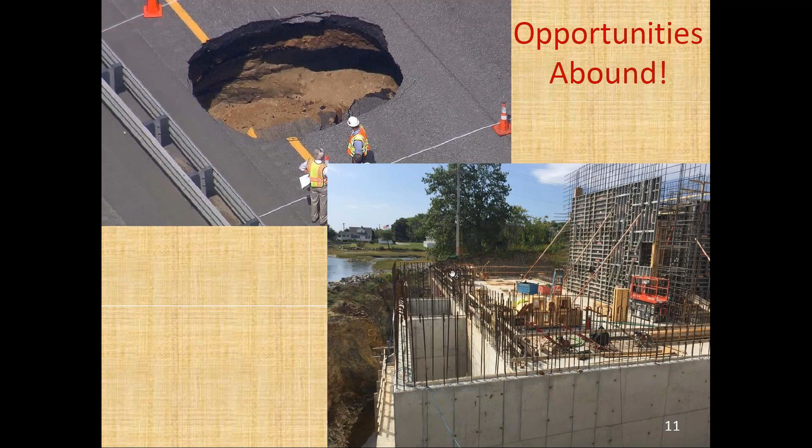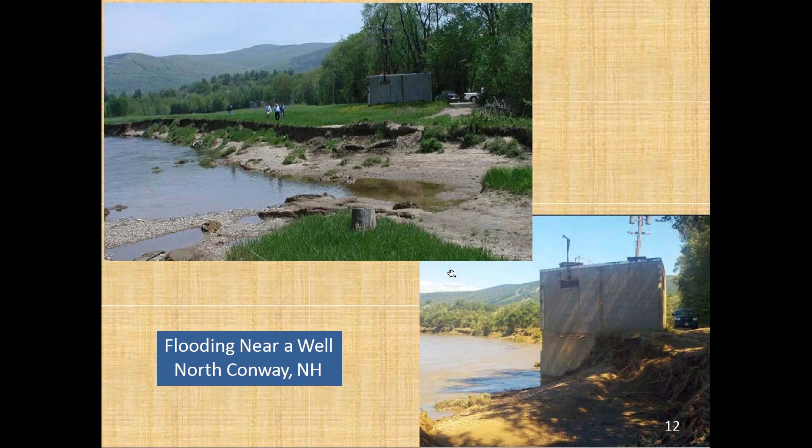Both drinking water and clean water SRF programs, we work together collaboratively to come up with the asset management umbrella of how we want to address climate change mitigation and climate change adaptation. Through this asset management umbrella, we're having communities inventory their assets, figure out their level of service, condition assessment, risk assessment. Communication is a key piece of all of this. Prioritization of their assets is important, as well as financial planning and life cycle cost analysis.

But to really address climate change, we're taking that asset management umbrella and adding more tools to it, and they all build to make it a more effective utility management system. We're supporting planning efforts, energy efficiency, flood resiliency, power resiliency, vulnerability assessments - those all go into figuring out where we need to focus efforts. Even a mindset shift, going from a mindset of waste or wastewater to resource recovery - those are all important pieces of this puzzle.

For the rest of today, I'm going to focus on just the energy efficiency tool, or the piece that adds to that asset management umbrella, and what we're doing with that through our Clean Water SRF program as well as Drinking Water SRF.

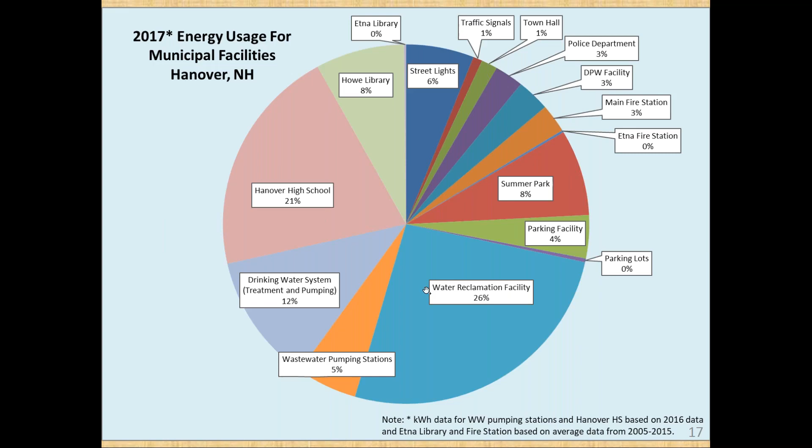So we looked at how they rank relative to other communities. Well, they're one of our most efficient activated sludge treatment plants. Just imagine what percentage that energy use would be for the municipality if this was a less efficient system.

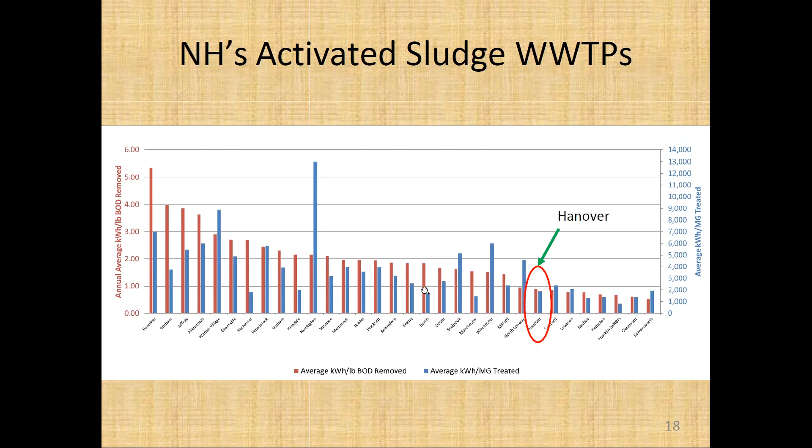As we were getting started in our energy efficiency program, one of the early things we did was update our design standards. We wanted to help these plants come online from upgrades and new facilities more efficient than they are now, because in the past everything was built for peak flows and peak demand 20 years in the future, which makes it difficult to operate, and certainly difficult to operate efficiently at day one.

So we really encouraged, instead of 2 really big blowers, putting in 3 to 5 smaller blowers, to have some flexibility in operation. You have to meet current peak demand and turn down requirements, which help you avoid over-aerating at the current daily minimum flows. We did the same thing for pump systems, giving them the option of putting in multiple smaller pumps, or at least leaving room so that as their flow and demands increase over time, they can add a blower or a pump if they need extra capacity.

So we had that in place, and then thanks to EPA giving us a heads up that the Department of Energy had a grant opportunity available, we jumped on board and applied, which, thanks to the partnership formed as part of this grant application with New Hampshire Saves, a consortium of the energy efficiency divisions for our 4 largest energy utilities, electric and natural gas, became our partners in this grant, providing the 20% match we needed. Through that grant, we were able to contract directly with our STAR auditor. This is a picture of him as a younger person.

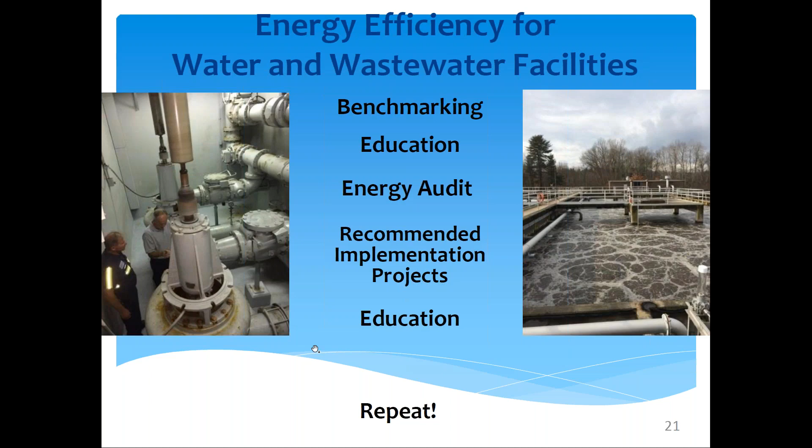We are continuing that cycle even though the grant is finished. We had really good feedback from municipalities and a lot of continued interest. So our Clean Water SRF fund said, well, we can provide low interest loans with principal forgiveness for these energy audits. We have some guidance documents, and as long as they meet that guidance, they can contract with the STAR auditor that specializes in drinking water and wastewater energy audits, and we'll forgive that loan when the project is finished.

But as you know, if you're working in the SRF program, the paperwork for small loans is no different than the paperwork for a large loan, both on the staff end as well as on the municipality end. So we had a few takers for this, but not as many as we would have liked.

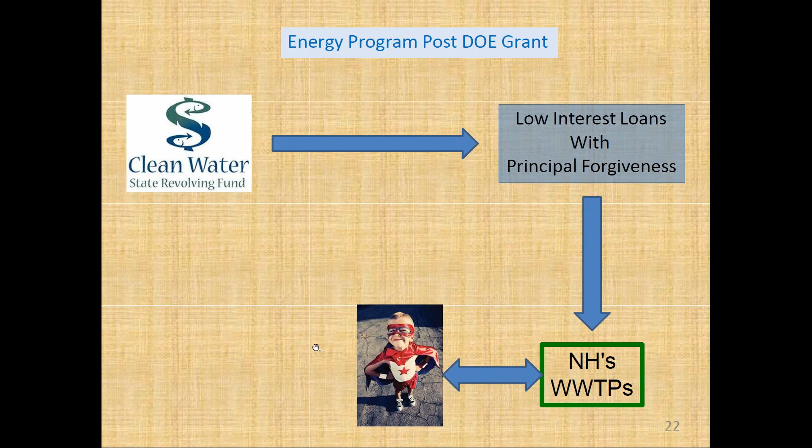So the next step was forget the loans. And this is the part that everyone loves, because there actually is a free lunch.

Through the creative thinking of our Clean Water SRF program and partnering with New Hampshire Saves again, as well as with Drinking Water SRF, we were able to use administrative funds and set aside funds to contract directly with the auditor, with oversight from DES Drinking Water and Wastewater staff, for the selection of which facilities we wanted to audit. We put a high level of interest on the scale, as well as embracing asset management. Those are things that help them score to receive an energy audit.

So when I get to call and tell a facility that they can have an audit, and all they need to do is just email me and say they want it, they absolutely love that.

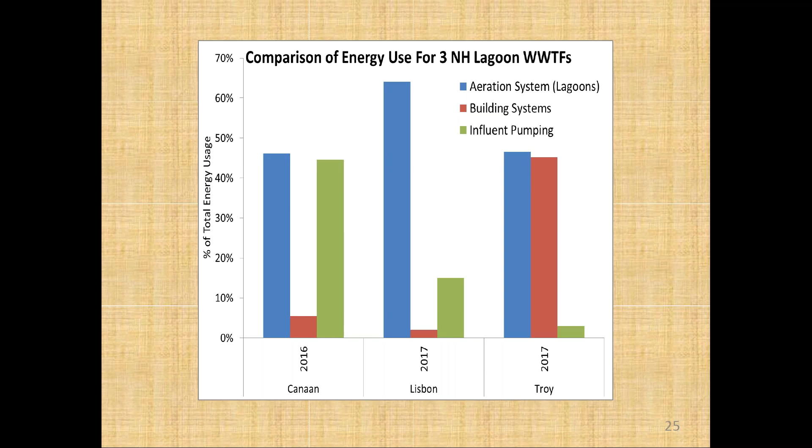This is Canaan, Lisbon, and Troy. They are three very similar, very small, very simple lagoon systems. Had they not each had their own audit, we would have said, well, you probably need to optimize your aeration system, and we'd be done with it. However, because of the audit, we found that Canaan had an influent pumping issue, Lisbon had an aeration issue, and Troy had an electric heat issue. So three simple plants, three totally different energy efficiency solutions. It really drives home why everyone needs an audit.

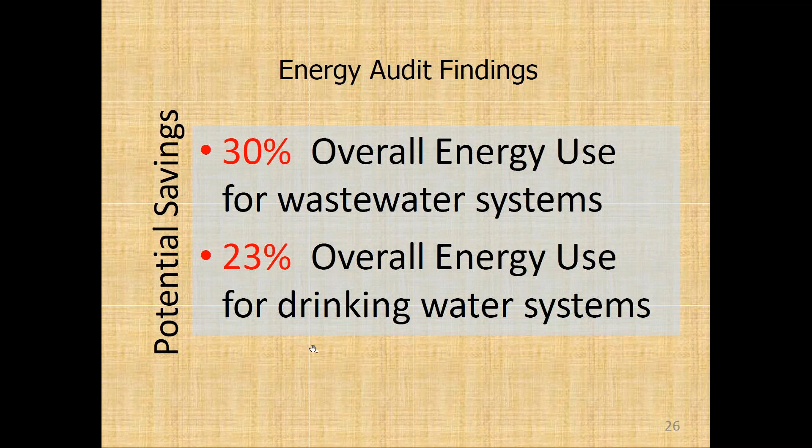Now, so far, our audit program has shown a potential savings of 30% for wastewater systems on average, ranging from 11 to 58% potential savings. Drinking water has shown 23% average savings. But with audits, it's a report—there's no savings unless the findings are implemented. So looking at implementation, those audit reports out of 41 audits completed so far, it's over $6.5 million in implementation costs. However, the projected annual avoided cost, or the savings, is almost $1.8 million, giving an estimated payback of just 3.6 years before incentives. So that's a lot of interest.

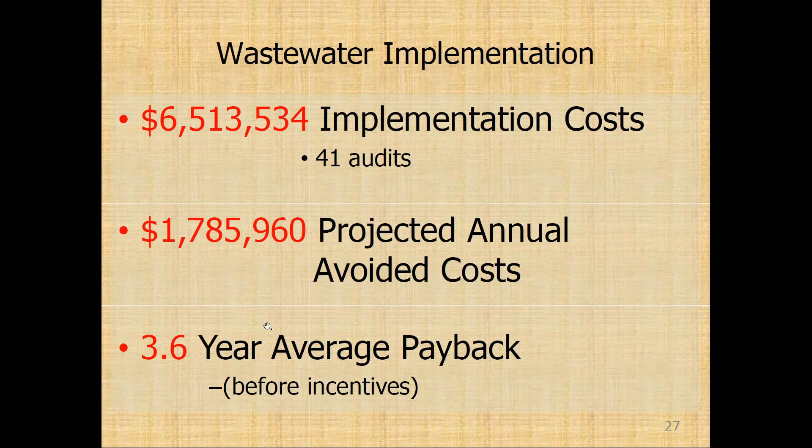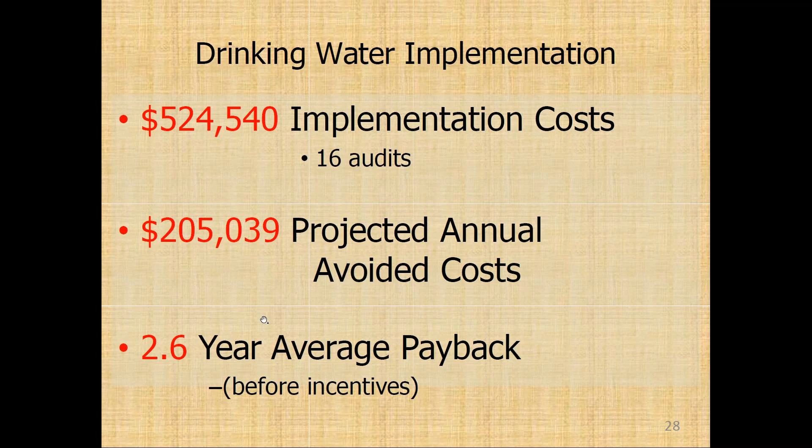Drinking water implementation: we've completed 16 audits so far, with $524,000 of implementation costs and over $200,000 in savings, for just a 2.6-year payback before incentives.

So getting into the incentives, I'm going to show a case study of how these additive incentives work. New Hampshire Saves, Eversource, in the case study I'm going to give—that's our largest utility—they have access to core electric funds, which everyone in the state pays into when they pay their electric bill, as well as Regional Greenhouse Gas Initiative municipal funding, or RGGI funds. Those we're allowing to be combined with the Clean Water SRF loan forgiveness that we have for wastewater projects, where we've instituted 50% forgiveness, up to $200,000 of the principal can be forgiven.

So that case study: this is the Winnipesaukee River Basin Program for Franklin, located in Franklin, New Hampshire. This facility is actually owned by the state of New Hampshire, Department of Environmental Services, and it's a regional system that serves 10 communities in the Lakes region in central New Hampshire. It's a prime tourist area, so it's a really important facility.

Last year, we selected this facility as the most efficient treatment plant in New Hampshire based on a kilowatt-hour per million gallons treated metric. We also have another facility in the state that we selected based on a kilowatt-hour per pound of BOD treated or removed.

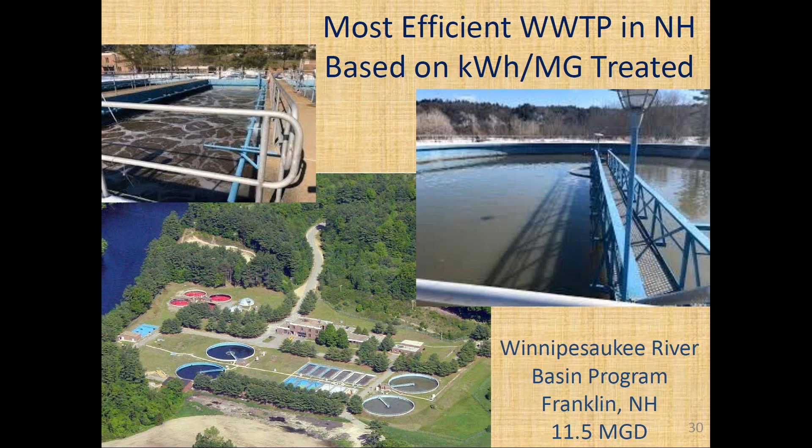To give you an idea of where they were, the Winnipesaukee River Basin is a really good example of EPA's Plan, Do, Check, Act cycle. They've just completed their third energy audit, and they complete an audit, then implement projects, complete another audit, then implement projects. So now we're on the third round of that.

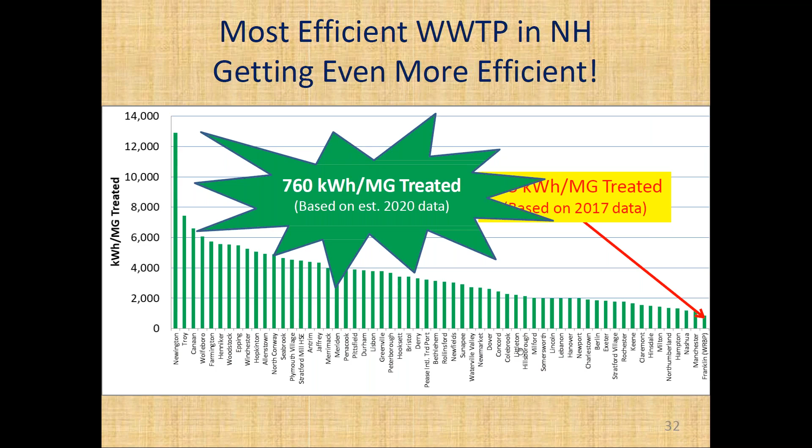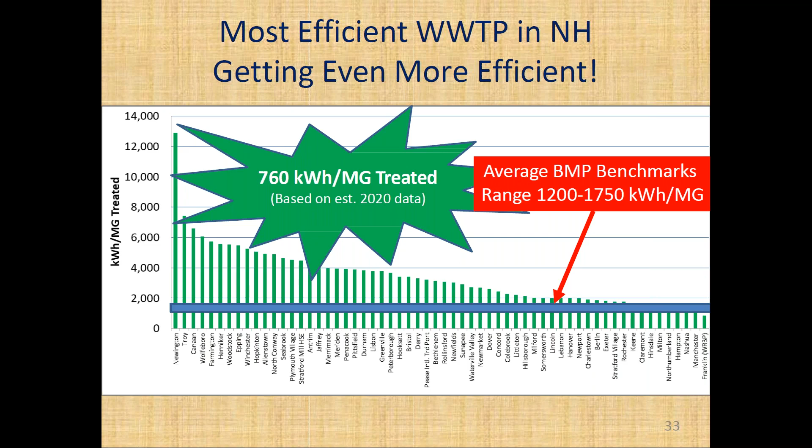Right now, they're using 853 kilowatt-hours per million gallons treated, which is pretty amazingly efficient compared to a nationwide basis—I'll get to that in a minute. After they implement the projects identified in their third audit, that will drop down to about 760 kilowatt-hours per million gallons treated. Compared to benchmarks I could find from other states for similar size and type of facility, that benchmark typically ranges 1,200 to 1,750 kilowatt-hours per million gallons. So after this next upgrade, it'll be about half of that, which is pretty impressive.

So the project includes addition of a right-size blower and controls. They're going to improve their process by not over-aerating any longer. They're replacing 2 return activated sludge pumps, and they're doing a lighting upgrade.

The estimated project cost is $400,000. New Hampshire Saves, Eversource, has committed $100,000 to this project. The Clean Water SRF has committed $200,000 in loan forgiveness. So the final cost to the loan recipient is just $100,000 for this work.

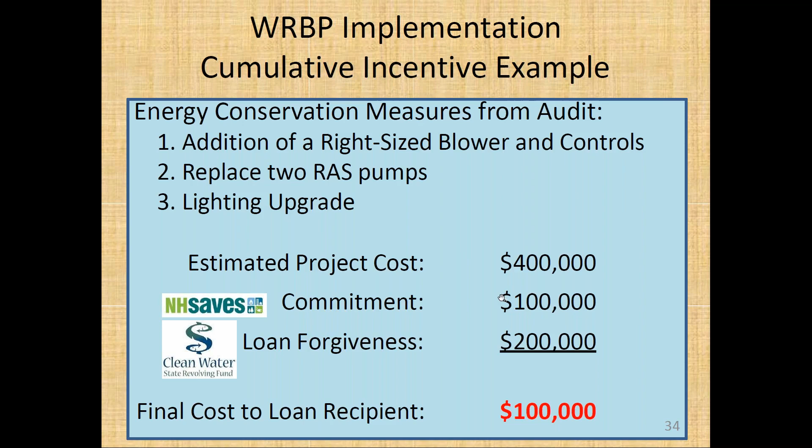The impact on the incentives of the simple payback: prior to incentives, payback was 11.2 years. It's a little on the long side, considering the equipment will probably last - it's got a 20-year life expectancy at least, and operators tend to keep things running longer than that. So it would still be cost effective. But after the incentives from New Hampshire Saves and SRF, the simple payback is just 2.8 years. So now it's certainly a doable project.

Then you look at the non-economic benefits that really add to that cost effectiveness. As I mentioned, improved process control - they're going to be able to no longer over-aerate. They will be able to monitor and control their dissolved oxygen with the control system that's being put in. So they're really optimizing how much air they're putting in the system.

How much energy they're using - they're lowering their equipment repair costs. They've got new equipment, so now they can focus on where that repair budget needs to go. They're also improving their reliability, both through redundancy - they're adding a blower.

They're lowering their energy use, so now if they're without power for an extended period due to a storm, they have more equipment that they can run on their generator. So all of that plus new equipment typically is more reliable.

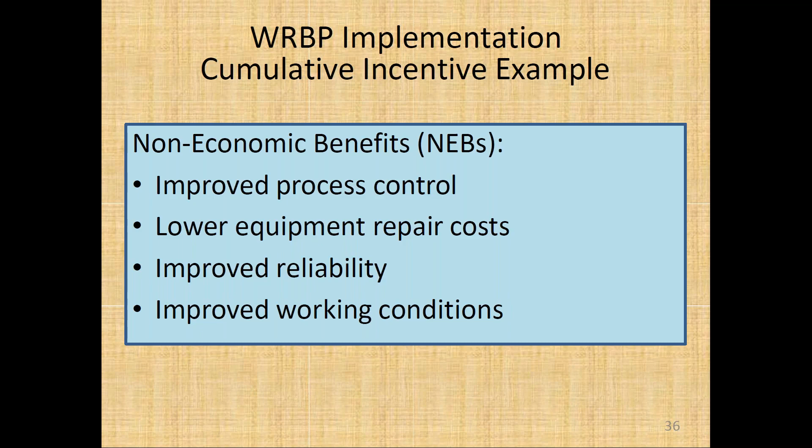They're also improving their working conditions. I don't know how many of you have been into a dark, dingy pump room that no one really wants to be in because they can't really see, the lighting's not very good. But when you upgrade the lighting, you can now see what you're doing to work. You can also see that it's a mess, clean it up, and now it's not a bad workplace. So everyone benefits on that.

To tie it back into climate change mitigation, the impact on the greenhouse gas emissions from reducing power energy usage down over 307,000 kilowatt hours a year will result in power plant emission reductions of over 400,000 pounds of CO2, over 1,000 pounds of sulfur oxides, and over 300 pounds of nitrogen oxides. So that has a long-lasting effect.

Winnipesaukee River Basin is a really good example of how to implement this type of process where they've figured out their energy costs. They hired their star energy auditor. They implemented energy upgrades, energy efficiency upgrades, and they saw savings.

And then they took some of those savings and they've gone through that process 3 times now. So now they're really looking at what can we do for renewable energy - that's probably the next phase for them. And if they can implement renewable energy, whether it's solar or an upgraded anaerobic digester system, something that's cost effective, then they can make those savings permanent and make the greenhouse gas emission reductions permanent.

So kind of tying this all back into the asset management umbrella and the climate change piece - our operators, drinking water and wastewater, they are amazing MacGyvers, we like to call them. They can keep some equipment running way past its expected life. But really, is that really the best answer for user rates, for energy efficiency, for climate change, for resilience? Those are the questions that need to be answered, and the data from energy efficiency and from asset management can help answer those questions. With that, do you have any questions?

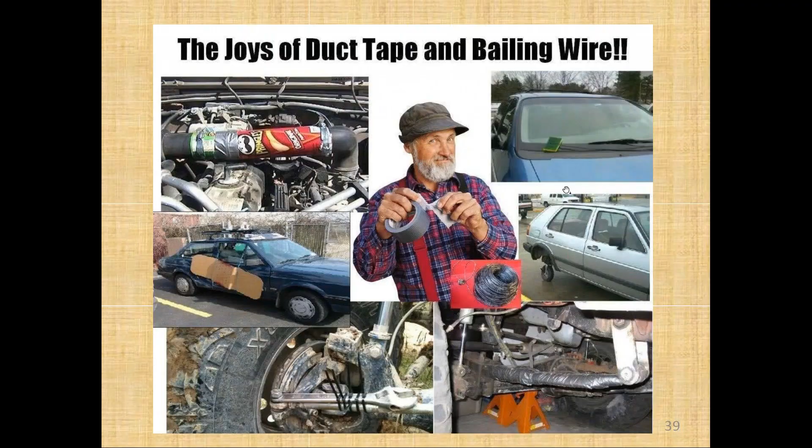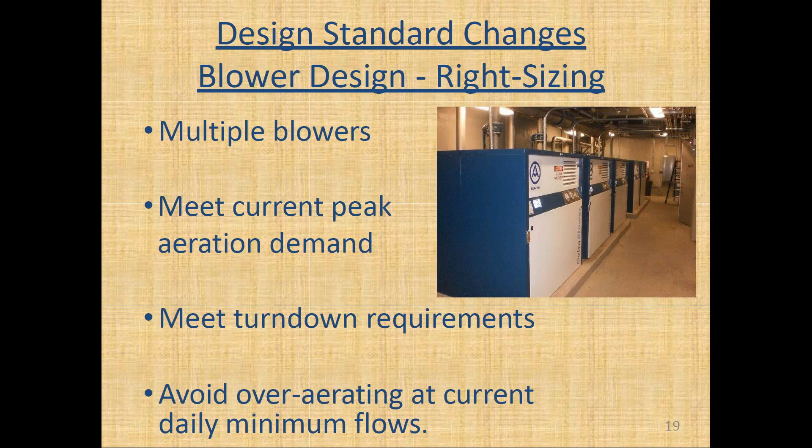All right, now, my name is Brandy Piers, like we had talked about before, and today I am here to talk to you about the State of Maine's Clean Water SRF and Climate Adaptation Plan.

So what is Maine doing? We're looking at knowing your risk, climate adaptation planning, and Maine's current status.

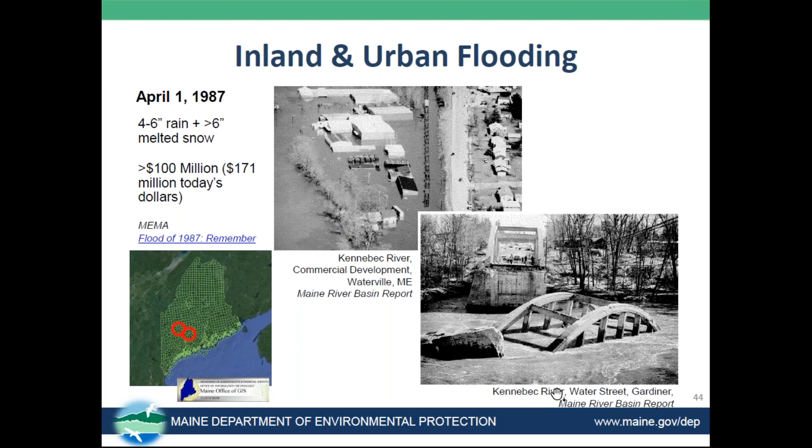So next I wanted to talk to you about a survey we sent out. We sent this survey out to some of our wastewater communities, and the state of Maine has a little over 200 publicly owned wastewater treatment facilities. This survey sample was 52 wastewater utilities were sent this survey, and we had 29 responses, meaning a 56% response rate.

Some of the questions that we asked were, has your facility operation ever been impacted by extreme weather events? Well, as you can imagine, 91% said they've seen extreme weather events affect their community. Only 3 communities responded no.

So what does that mean to us as a regulator? We have to look at this. It means we need to stop and assess our wastewater treatment plant. And what can we do to help?

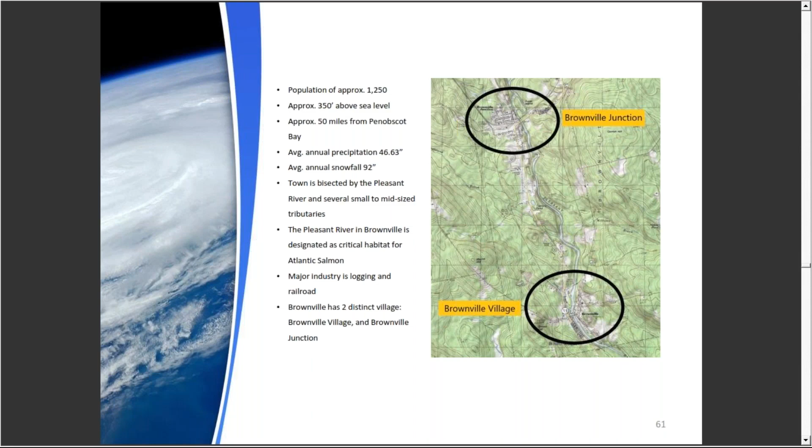So let's talk about the wastewater system in each of these villages. Brownville Junction has a conventional gravity collection system, mostly PVC piping with precast manholes, built primarily in the late 80s. They have 1 main pump station, which is a dry pit non-clog style pump station, which collects all wastewater and pumps it to the treatment plant.

They have 4 smaller submersible stations, all grinder stations, duplex stations, with a centralized wastewater treatment facility. That treatment facility is a large engineered subsurface septic system. The one main pump station does have a dedicated generator on site. The 4 smaller stations do not, but they have receptacles for a mobile generator.

In Brownville Village, there are 11 cluster subsurface systems, each serving 2, 3, 4, or 5 houses that all flow into a septic tank with an effluent pump station. That pump station pumps it up to the disposal field or fields. Some are larger, some are smaller. Of these 11 systems, none have permanent generators. They all have receptacles.

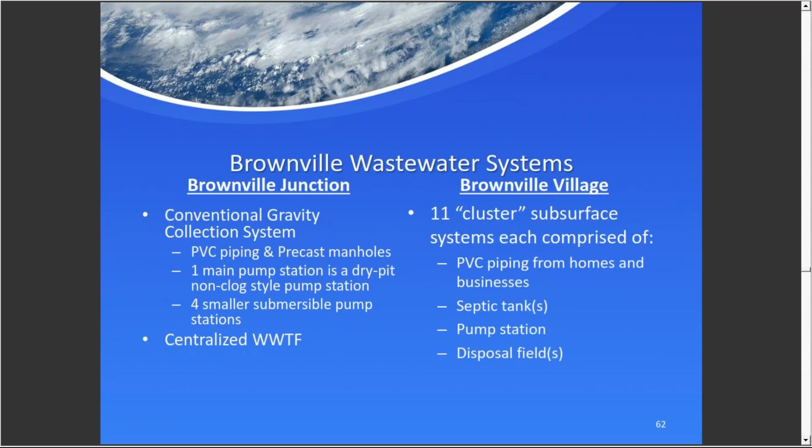Let's focus on Brownville Junction for a minute. You can see the map of the system as laid out, with the Pleasant River running right down through the middle. On the west side of the river is the primary collection system area and 4 of the 5 pump stations. On the east side is the wastewater treatment plant, in the top right corner, and a small collection system area with 1 pump station. The importance of this, as we'll get into, is access to all these facilities given that you have a major river segment and many tributaries running through the area.

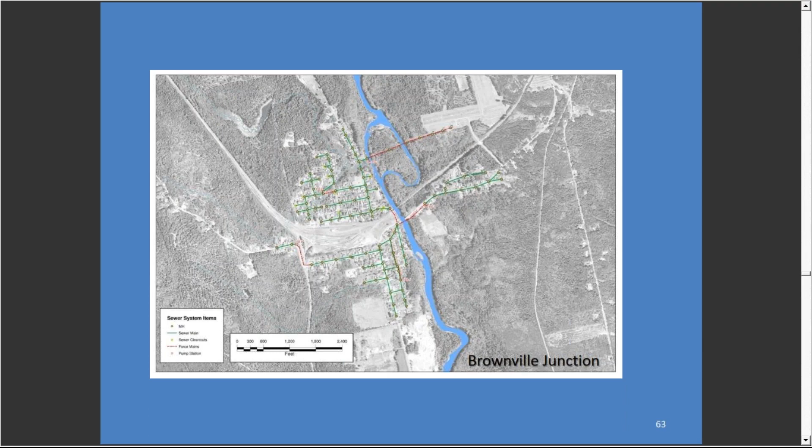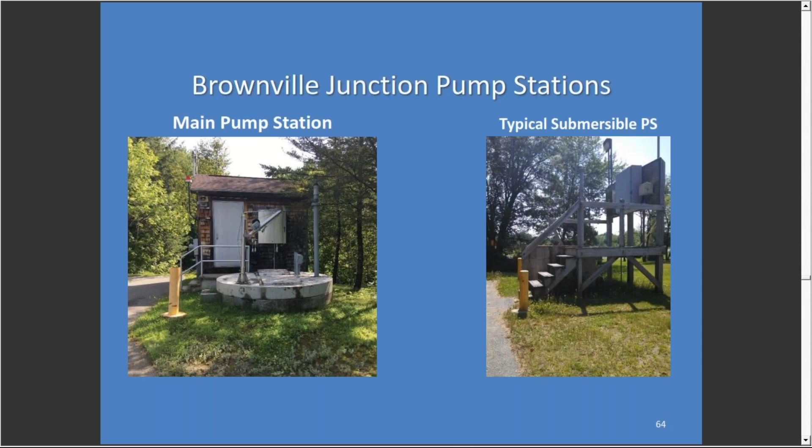Typical submersible station on the right. Again, there's a platform, elevated to be above the base flood elevation. So they were prepared with the facilities they built back in the late 80s to be above the base flood elevation. It was the one thing everybody was looking at back then, floods.

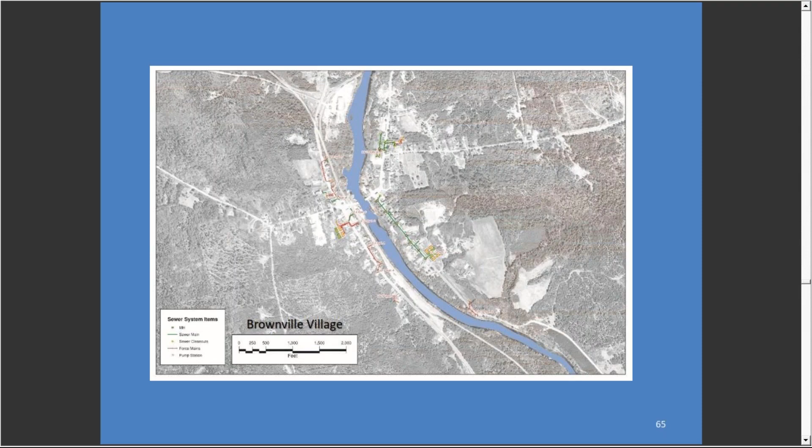This is Brownville Village, about 6 miles south of Brownville Junction. It's a little harder to see, but all 11 cluster systems are basically along the river on both sides. There is a bridge that crosses right in the center of town, and all of these systems are subsurface systems.

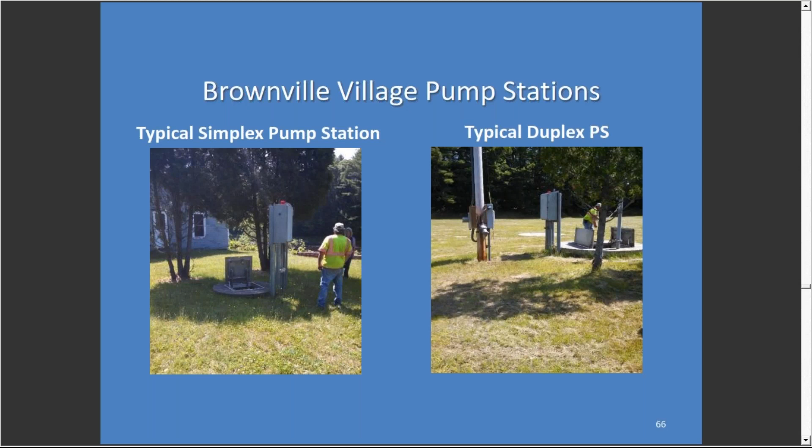So we went in and assessed the climate related threats for Brownville using EPA software. University of Maine had done a study, and there was a fair amount of information out there that was really helpful in figuring out what the actual threats for Brownville might be. Floods being one of them, clearly.

Increased annual precipitation—these are subsurface systems, so if groundwater rises, it could affect treatment ability. Increased storm intensity leads to I&I, overloading systems and increasing pumping times, among other things. Extreme wind is a concern too: when you have 11 sites in rural Maine with varying topography and trees everywhere, wind knocks down trees a lot, and it knocks down power a lot. Winter storms, snow and ice round out the list.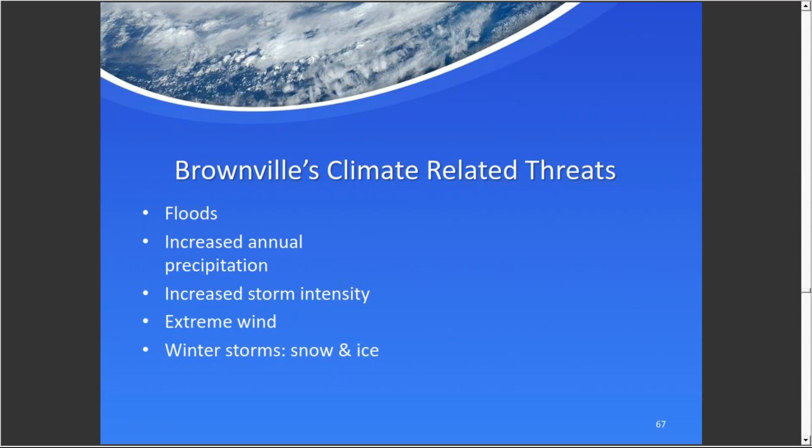So these were the big threats for Brownville, and we started with floods by pulling up the flood map. As you can see, the stars indicate all of the pump station locations, and they are all over the place. Though very few of these facilities are actually in the floodplain, it's going to be tough to get to each one without crossing a floodplain to reach it.

So access to each of these facilities became incredibly important. The other issue is Brownville Village, on the right end of this map. When this map was originally developed, there was a dam just upstream of Brownville Village that's since been removed, so we didn't really know the current actual base flood elevation for Brownville Village.

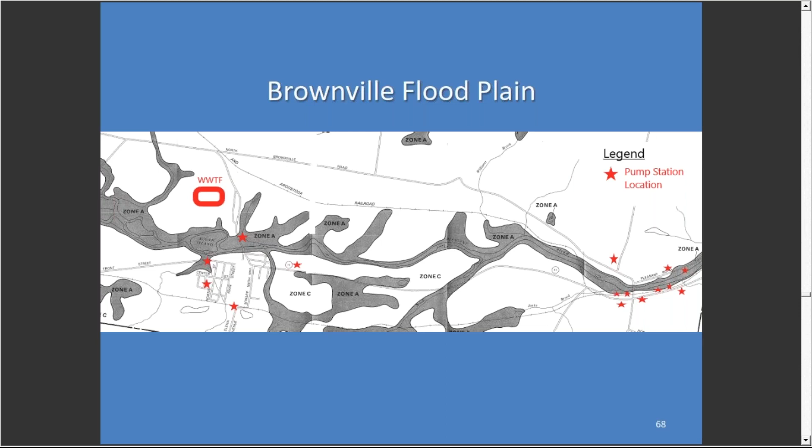As Brandy alluded to earlier, the funding, the $20,000—Brownville did get a $20,000 grant. It went along with the facilities upgrade capital improvements program project, and a share of that was used to hire a hydrologist to actually define the base flood elevation for Brownville Village, so we knew what it actually was using current information.

So then we went back through the history of what Brownville has seen in recent times for extreme weather events. In 1987, there was a statewide flood of monumental proportions. Some areas saw 100-year floods, some more, some less. Brownville actually only rated to about a 45-year storm that year.

In 1998, the ice storm hit, which, as most people remember, meant 5, 6, 7 days, sometimes longer, with no power, extreme ice, and trees down everywhere. As I alluded to earlier, the public works crew also serves as the water and wastewater operators for these systems. So not only did they have to keep roads sanded, cleared, and trees cut, they had to get to all these facilities with their mobile generators.

In 2008, a 50-year flood hit when Brownville received 6 inches of rain in one day. In 2012, a severe thunderstorm stalled over Brownville and dumped 6 to 8 inches of rain in a 6-hour period. The topography in Brownville is a valley, and the river runs right down through it. So all the rain that hits the surrounding area swarms right down to the 2 villages and into the river.

Then in 2020, this spring, Brownville received around 18 inches of heavy, wet snow that knocked trees and power down. It was incredibly devastating to them. The public works crew and the wastewater crew all teamed up. It took about 4 days of working around the clock to clear trees, clear roads, and reestablish access to all these facilities while trying to keep pump stations going and everything active.

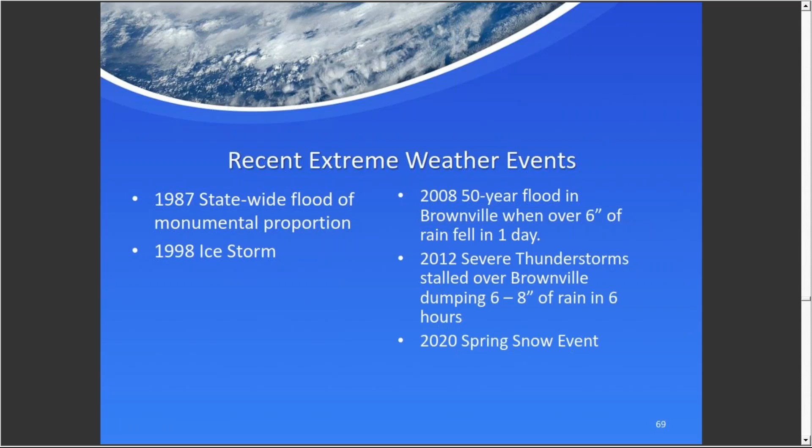In 2012, here are a few pictures. Roads were washed out, culverts were washed out, sewer mains actually floated in certain areas because water would erode the ditches, and sewer and water lines ended up in the ditches, or sometimes in the roadway. It was impassable for a number of days.

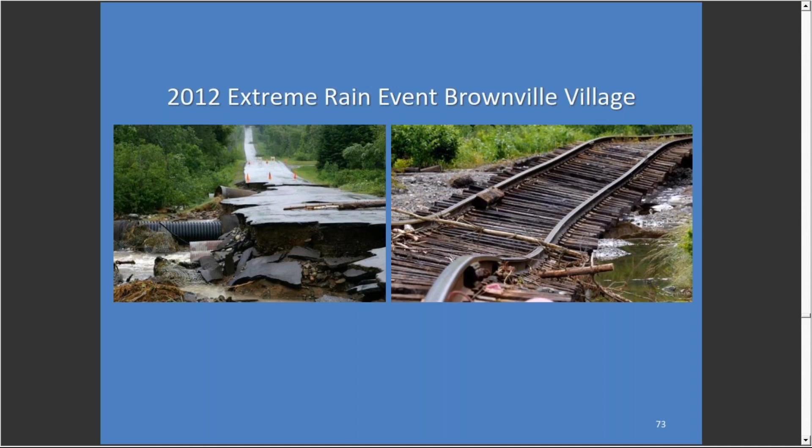So the climate adaptation plan's goals were to assess how climate change might impact the wastewater system and the potential impacts to the environment. If you have issues in your wastewater system, floods or whatnot, and systems aren't pumping, what potential damages happen to the environment? This is equally important as the damages to the systems themselves.

Develop, prioritize, and then implement strategies for dealing with climate change. Education for the operators, community officials, regional agencies, and the general public. If everybody understands what's going on, it's certainly a lot easier to deal with, and more efficient to get from point A to point B.

So for Brownville's team, one of the things I'd like to stress is that we brought in the select board, two members with historical knowledge, but not only historical knowledge—they had the authority to act. The town manager was at all meetings. We had multiple meetings, and every time we would collect a bunch of data and information and assess it, we would gather.

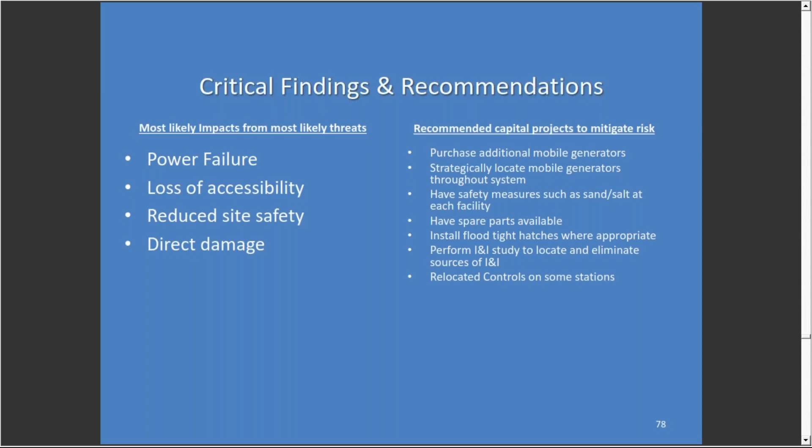Some of the O&M efforts we recommended: assume all forecasted storms are going to exceed their forecasted strength and duration—don't predict it's not going to be that heavy a rain. If you plan for it, you're better prepared for it.

Fuel all generators—keep them fueled, working, and tested. Cut back trees annually around stations and controls to the best of your ability. Educate customers on potential impacts. Inspect and clean culverts, since plugged culverts can lead to erosion, failures, and other issues. And ensure safety measures are at the ready at each site.

Critical information used during this study to become successful was historical pictures, which help accurately define where the flood levels reached at each of these major events.

Active involvement of the town really helped obtain actual knowledge. Operators, selectmen who had been on the board for years, trustees, know what they really went through during major storms. It's important to talk to the people that lived in these communities and worked in these systems when major events hit, to understand what they went through and how to improve upon that.

The Maine Department of Transportation was a big help. They have a bridge in Brownville Junction and a bridge in Brownville Village. Their design information, water information, and historical information were used to help us.

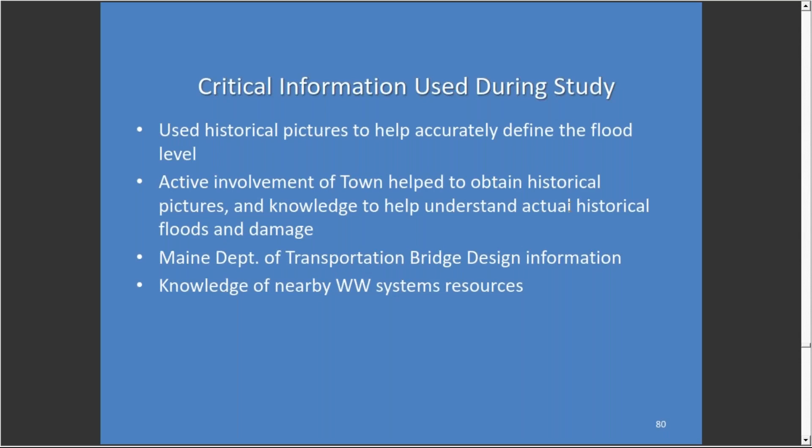I think some of the key knowledge gained by the town and the team was to know the flood level, not just at each facility, but along every access route, to really understand the risks. If you're driving in a car and you're a passenger, you're not going to remember how you got there as well as if you were the driver.

It's really important that the team be fully integrated in all aspects of this work, and not just given the report at the end. It won't mean as much.

Understanding the potential impacts to facilities and the environment helps better understand the town's resources and the resources around them. When a selectman is just given a report at the end, rather than actually being out there and seeing what the operators go through, that matters less. Seeing it firsthand is important for budgeting and for understanding.

And then there's the plan to prepare and react for storms. Specific to Brownville, there are 17 sites. Which one's most important? There are multiple factors, as far as potential risk of failure.

What happens if a system fails? Some systems, like Brandy alluded to, are on a dead-end street and don't even get 100 gallons a day. Knowing which ones you have to reach first is critical to being efficient at what you do.

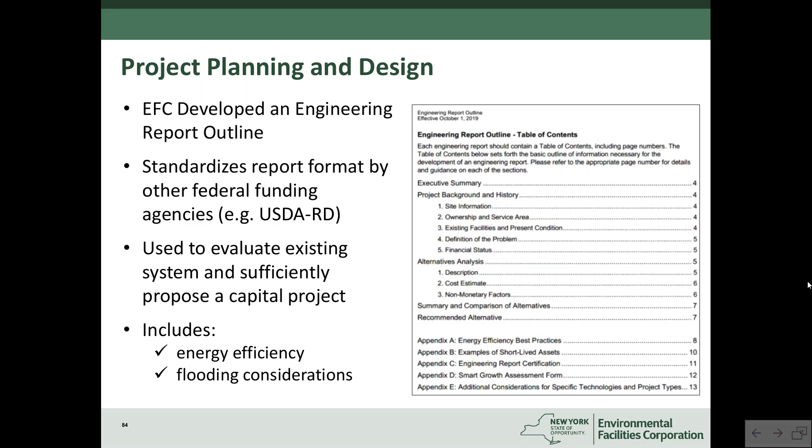Energy efficiency measures: the 2010 and 2011 CWSRF CAP grants included a requirement to provide some additional subsidy, and we in turn provided principal forgiveness or grants to communities. To promote energy efficiency, we required that an energy evaluation be conducted in order to receive the last 20% of the grant. We partnered with the New York State Energy Research and Development Authority, or NYSERDA, to complete FlexTech energy evaluation reports for all of those projects.

Since 2011, we've not required the energy evaluation reports, but we've continued to promote energy efficiency through our engineering report outline. NYSERDA a few years ago developed a best practices handbook for wastewater treatment plants, identifying items such as high efficiency motors and fine bubble diffusers that can be implemented at the treatment plant to be more energy efficient. So we require that the engineering report evaluate what energy efficient measures can be implemented.

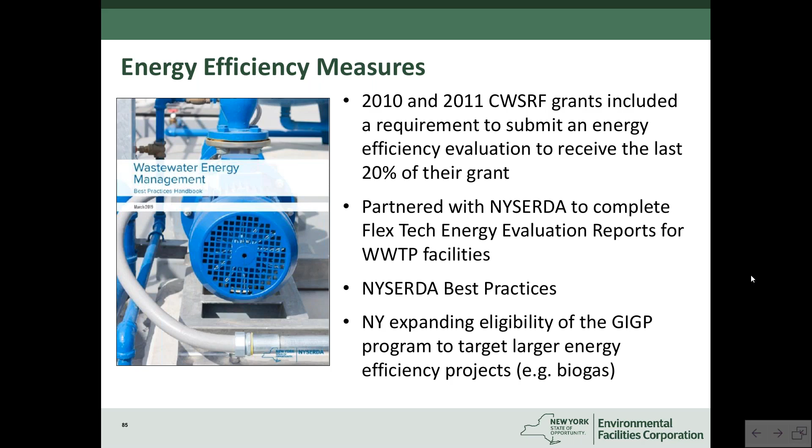Flooding considerations: we're also working to fund projects that are protected from the threat of flooding. A couple of photos on the right show the city of Binghamton, the Binghamton-Johnson City Wastewater Treatment Plant. They had a major flood in 2006 and 2011. You can see the blue tops of the digesters in both photos, one surrounded by floodwaters and the other on a drier day.

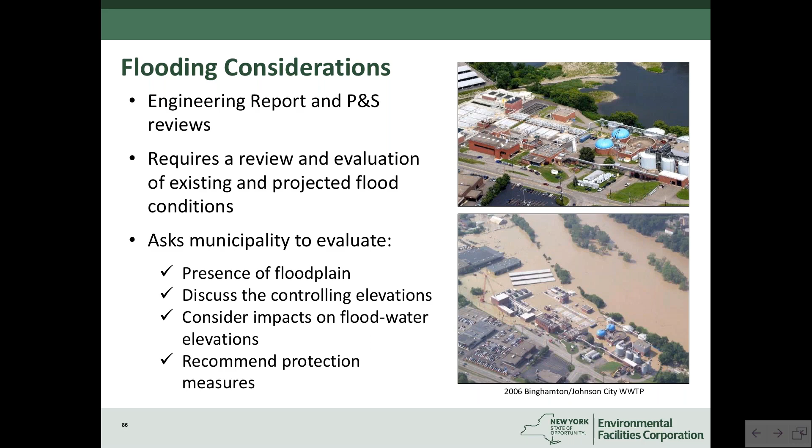For the flooding evaluation, the consultant needs to review existing data such as the flood insurance rate maps and check for the presence of a floodplain. They need to discuss any controlling elevations such as the 100-year flood or the flood of record, consider the impacts of floodwater elevations, and recommend protection measures such as raising equipment to a higher elevation or installing flood doors.

Flood elevation standards: historically in New York we've used 10 State Standards, but in recent years we've relied more heavily on TR-16, prepared by NEIWPCC. 10 State Standards requires that the treatment plant remain fully operational during a 25-year flood, with protection against structural, process, and electrical equipment damage during a 100-year flood. TR-16 is more stringent, requiring critical equipment to be 3 feet above the 100-year flood elevation, and non-critical equipment 2 feet above. TR-16 also requires that existing facilities be improved to the maximum extent possible to meet this flood protection criteria.

Evaluations might show that there are challenges to implementing the increased levels of protection. We also ask that the consultant look at the potential or possible vulnerability of the facilities, and the differential cost to raise them up versus the replacement cost of new equipment.

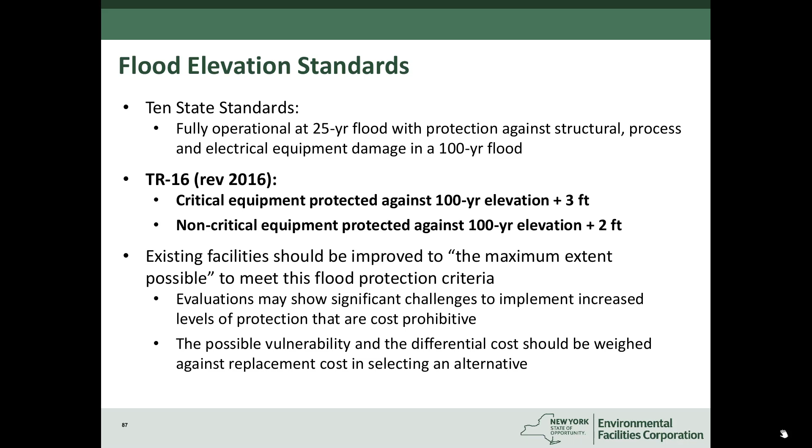I'm going to talk about the storm mitigation loan program. Kind of ironic, as remnants of a hurricane are raining down on my house.

On October 29th, 2012, Hurricane Sandy came ashore in New York and New Jersey, causing a substantial amount of flood-related damage. Congress passed the Disaster Relief Appropriations Act of 2013, which provided $600 million to New York and New Jersey for resiliency projects. Split between the states, New York received $340 million, and with a 20% match, the total amount of financial assistance was $407.6 million. That $407.6 million was split between the Clean Water State Revolving Fund at about $340 million and the Drinking Water State Revolving Fund at $68 million.

And these projects funded by this program were related or limited to mitigation projects—either to reduce flood risk, damage, and vulnerability, or enhance resilience to rapid hydrologic change, or because of a natural disaster at treatment works.

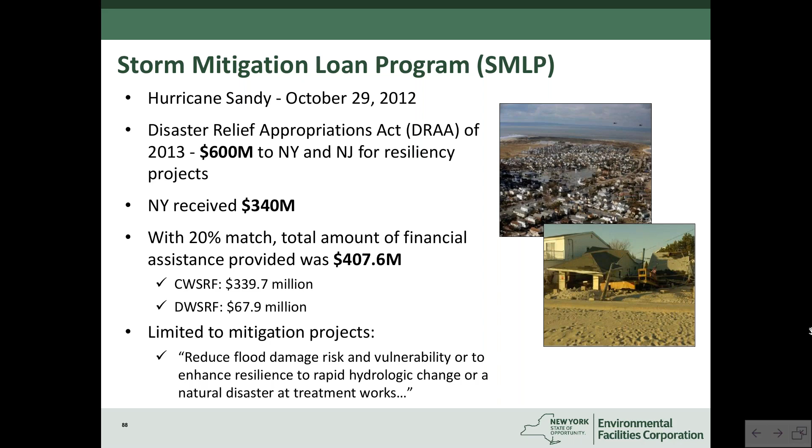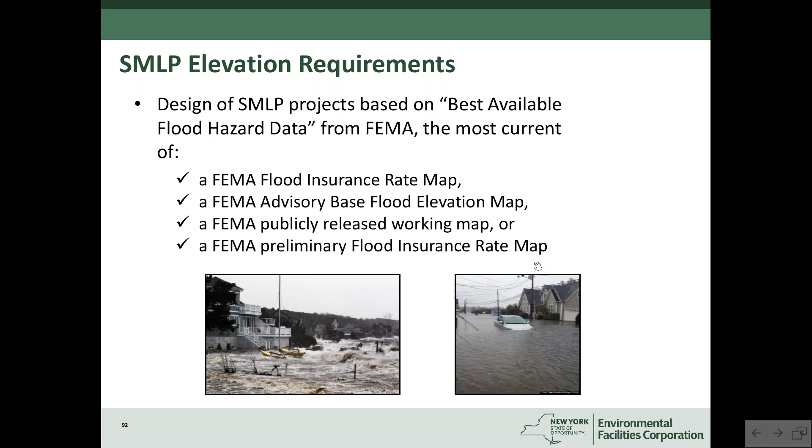All right, I'm going to talk about some of the technical requirements of the Storm Mitigation Loan Program. First, the applicant had to determine the base flood elevation. They had to use the best available flood hazard data from FEMA—so it could be the flood insurance rate map, an advisory base flood elevation map, publicly released working maps, or even preliminary flood insurance rate maps. Using the base flood elevation information, the engineer for the project had to design facilities to meet those requirements. These requirements were special for the Storm Mitigation Loan Program and different from what we see in TR16.

So the baseline standard: they had to go with the most stringent of either 100-year flood plus 2 feet, Sandy high water mark plus a foot, or the 500-year flood. And then for critical equipment, if it was in an area exposed to sea level rise, we were looking at 100-year flood elevation plus 5 feet, the Sandy high water mark plus 4 feet, or the 500-year flood. And then critical equipment in areas not exposed to sea level rise was the 100-year plus 3 feet, or Sandy plus 2 feet, or the 500-year flood elevation. I'll note that in nearly all cases, the 100-year plus however many feet is added, that was generally found to be the controlling elevation.

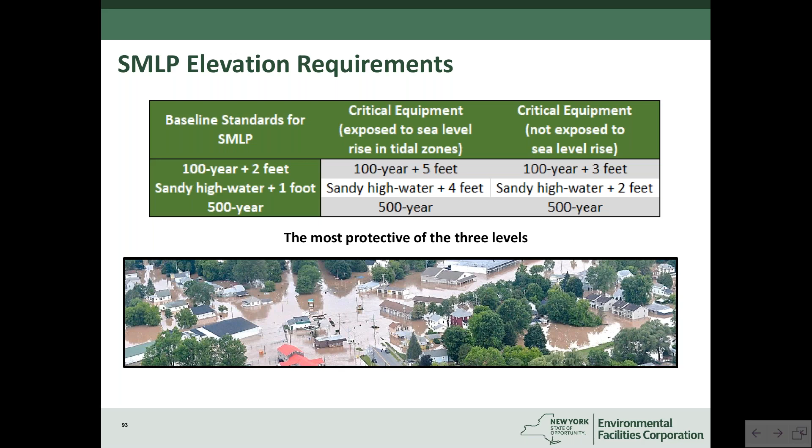All right, and lastly, I'm going to talk about a case study in Nassau County: the Barnes Avenue Interceptor Sanitary Sewer Overflow Correction Project. It took place in an area that had a history of SSOs during wet weather. Sewers in this area served the hamlet of Baldwin and village of Hempstead in Nassau County, and the SSOs typically were surcharging manholes. This area had significant damage, very near the southern shore of Long Island, after Hurricane Sandy.

So the solution here was the installation of a flow diversion pump station and force main, and then also the upgrade of the Newman's Court pump station in the village of Hempstead. The basic idea was to divert about 3.75 million gallons a day from one of Nassau County's wastewater treatment plants, the Bay Park Sewer Treatment Plant, to the county's Cedar Creek Treatment Plant in order to mitigate overflow conditions. It basically had too much flow, overwhelming the sewers in one area, causing the surcharging, so they diverted flow to the other treatment plant.

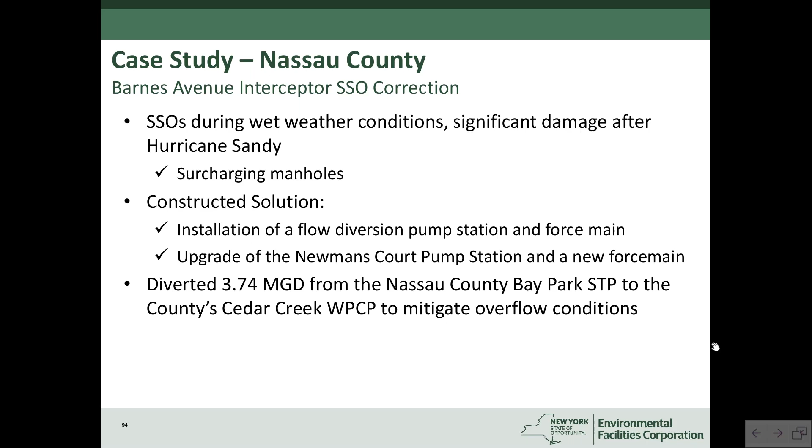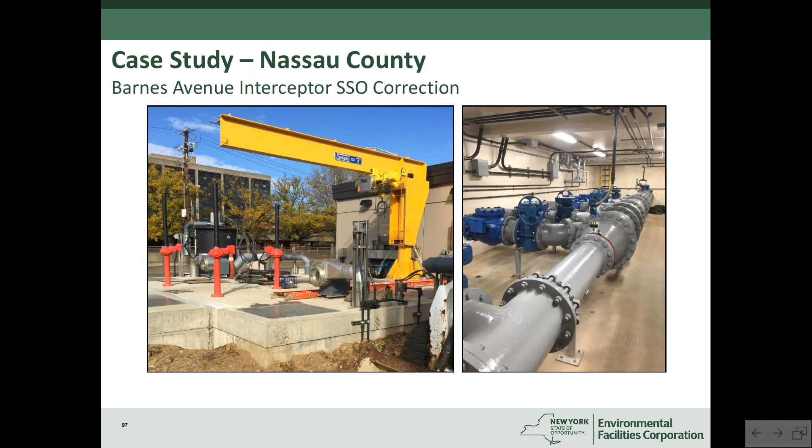And then we have some photos of the completed work, high and dry. Hopefully we'll stay that way. That's what I've got. Thank you.